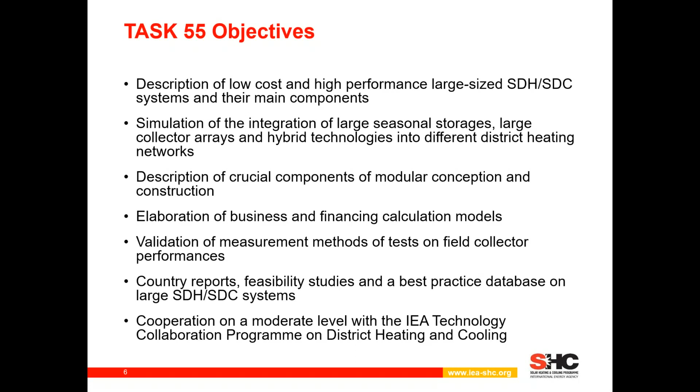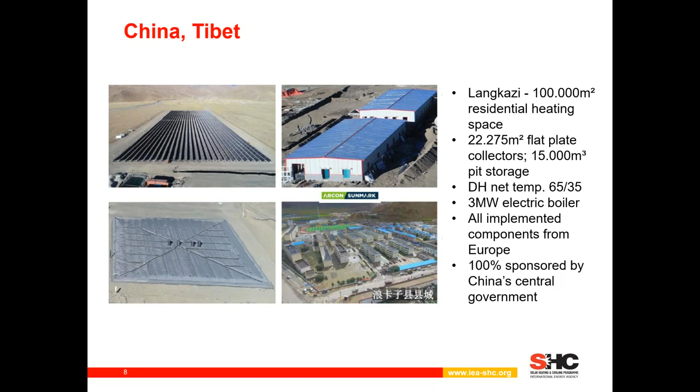And this is another installation, which is pretty new. It's been operating since November 2018, in Tibet, about 22,000 square meters of collectors, also with seasonal storage. They have a low temperature district heating net, and what's very special is that all components of this installation are from Europe. Most special is that China's government is 100% sponsoring this project. So China shows us how it can work.

These are the trends of solar district heating. Denmark infects several countries around the world with their large installations and long-term experience. A further trend is to maximize the solar thermal share, to eliminate barriers, and to find opportunities for solar thermal, and then further development of seasonal storage concepts.

Then we need to define model-based control strategies for the whole system, not only for the solar thermal part but for the whole system, including the district heating net. And then it's needed to design a solar thermal system including hybrid technology. By hybrid technology we mean seasonal storages, biomass, or waste heat, or interactions with CHPs.

So I'm at the end of my presentation. I will tell you where our next meetings will take place. In 2 weeks we will have our 6th meeting in Spain, in Almeria, from the 8th to 10th of April, and we will have an interesting technology tour to the solar platform of Almeria. It's a very big testing platform for solar collectors.

The 7th meeting will be in Sweden, in Härnösand, not at the end of September as planned. It's pretty new - since yesterday we know it will be in the first week of October. We will send out the date soon. So if you want to participate in one of these meetings, just please contact me.

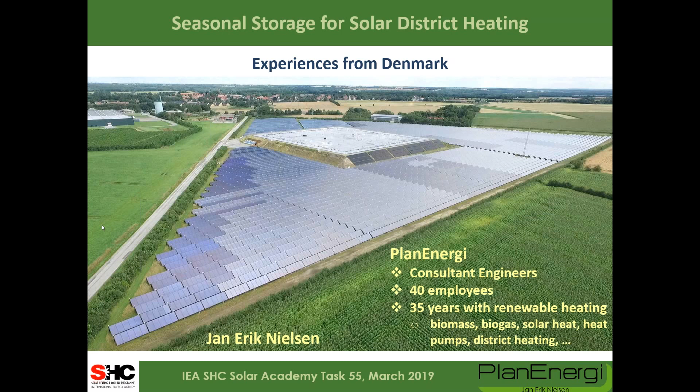Please. Thank you very much, Bärbel, for the nice introduction. And hello everybody. I would like to share some experiences from Denmark on large seasonal storages. I'm working with the company PlanEnergi, a small consulting company based in Denmark. We are 40 people, but we have long-term experience with renewable heating, especially district heating.

Coming to the storage, we see these large heat storages as a very important component in future energy systems, because having these storages, you have the possibility to couple the electricity sector with the heat sector. There can be interaction via heat pumps and combined heat and power plants. So these heat storages can then help levelize the dynamic electricity production from wind turbines and PV fields.

But today I will not go into all this system, but I will focus on the interaction between, or the connection between, the solar thermal collector fields and the large seasonal storage.

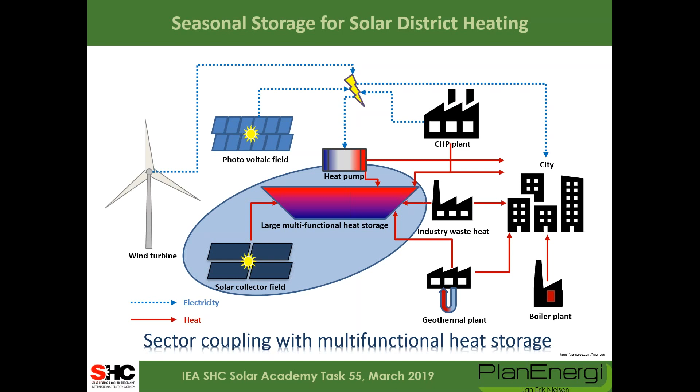So why do we do this in Denmark? Yeah, because we want to couple the electricity sector with the heat sector. We have a lot of wind turbines in Denmark - more than 40% of our electricity production is from wind. So we have the need for this, and we have been working on this for some years.

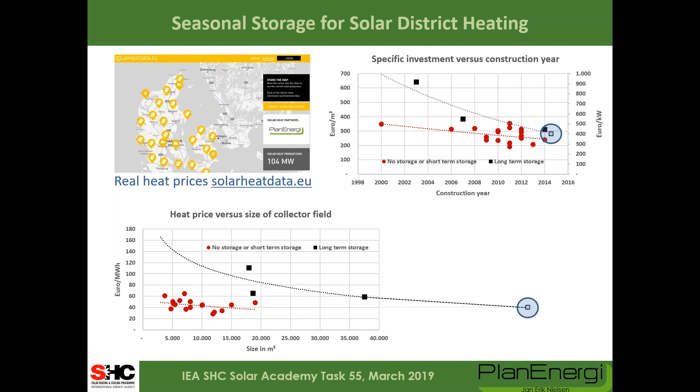The next figure here is the heat price, in euro per megawatt hours, and you see here, of course, the same tendency. The x-axis is here the size of the system. So we have very large systems now.

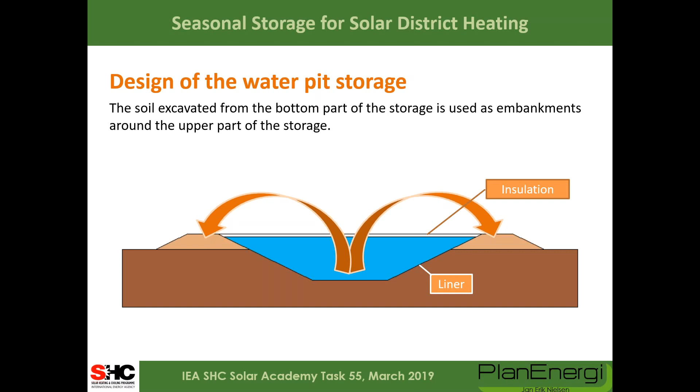We have most experience in so-called water pit storage, which is a simple storage where you just dig a hole in the ground and you put the soil from the hole to the sides. You put a foil inside this hole and you fill it with water, and then on top you put an insulated lid.

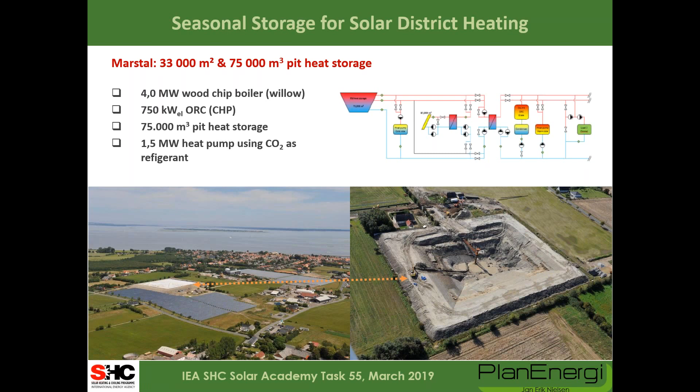An example of that you see here in Marstal. This is a 75,000 cubic meter storage. To the right we have a picture during the excavation. You see these large machines seem small in connection with the storage size, and this is then to the left we have the final storage covered with the lid. This storage serves in total 33,000 square meters of collectors.

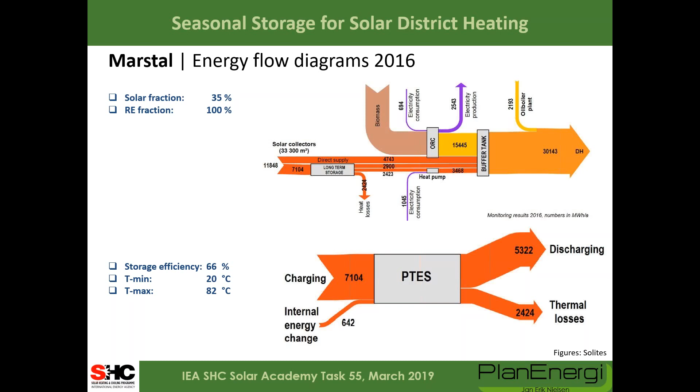We have done some measurements. So on this system we have a solar fraction of 35%, and they claim to have a renewable energy fraction of 100% because they fire with biomass. If we look then on the energy balance on the store, we see here a storage efficiency of 66%. So this means that 34% is lost. We have the temperatures between 20 and 82 degrees.

Another example is in Dronninglund. Here we have 60,000 cubic meter pit heat storage, serving 38,000 square meters. You see the collector field to the left here, and the storage is actually integrated in an old gravel pit. And to the right you see the whole system.

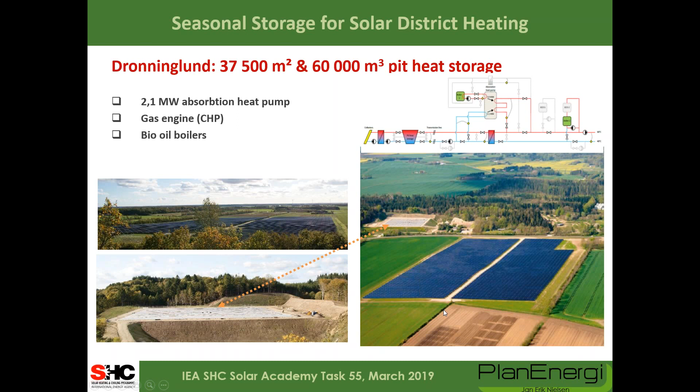Here we have a solar fraction of 40%. And what is very interesting in this case, when you look at the heat balance for the storage, we have actually a storage efficiency of more than 90%, so the heat loss is less than 10%. So this is very encouraging, actually - the annual heat loss is only 10% of the energy output.

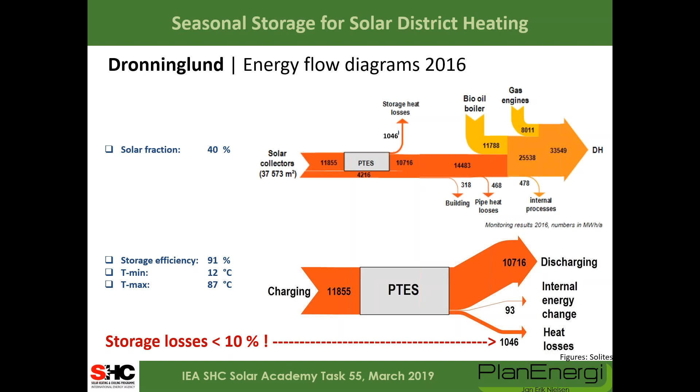You see here a low minimum temperature, so there's a heat pump which is lowering the temperature in the storage in the winter and in the springtime, and this is of course part of the explanation of the low storage heat loss.

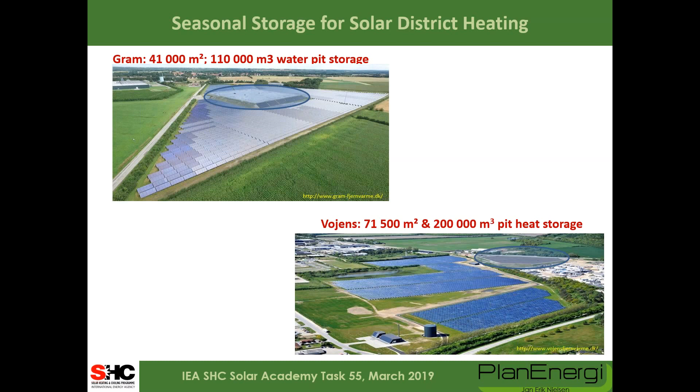We have more pit storages, but we have not in PlanEnergi been involved in these systems, but they have very large storages between 100 and 200,000 cubic meters.

Looking at the prices, if you make them big enough, you have a cubic meter price of around 30 euro. So this is not very expensive actually for energy storages. This is a very cheap price.

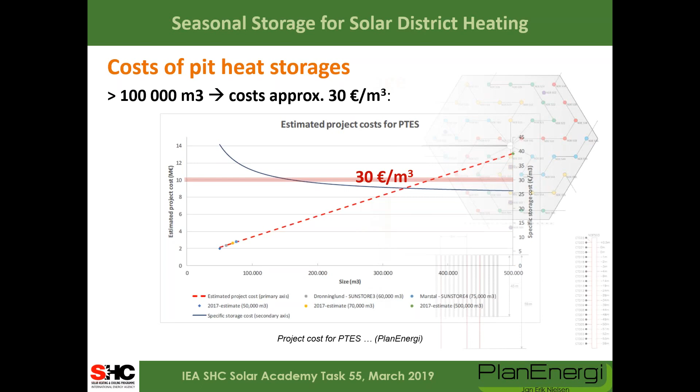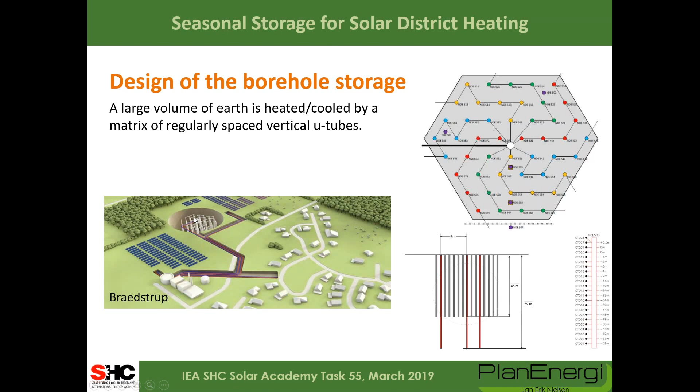We have one demonstration project of borehole storage for solar energy. This is demonstration size only. But you see here the model of it. So we have pipes in the earth, and you see on the next picture here that we put the heat down in the earth in the summer, and then we can extract it in the winter. Also here we have a heat pump.

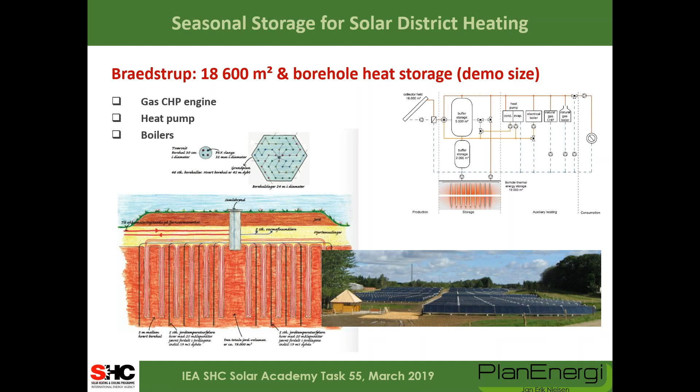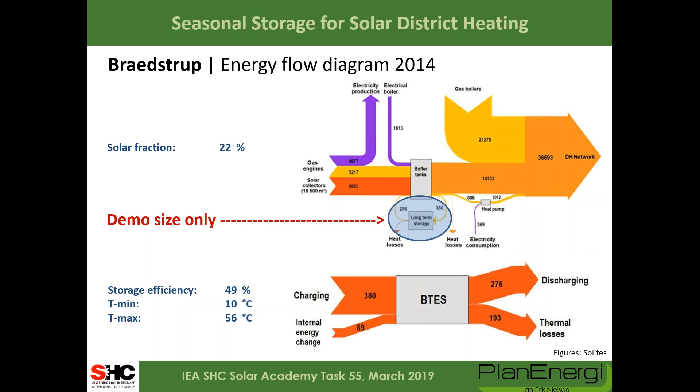If we look at the heat balances here, we have a solar fraction of 22%, and you see in the circle around the storage, as it's only a small size storage, it's only a small part of the energy going to this storage. And this is also seen in the storage efficiency, because the bigger the storage is, the bigger the storage efficiency can be. So here we have only a storage efficiency of 50%, but compared to the size of the storage, it's actually quite good.

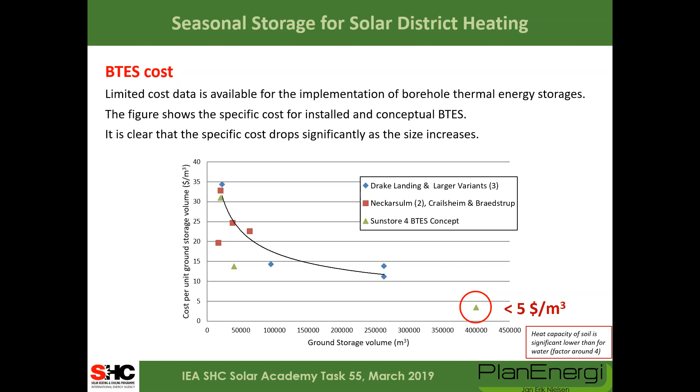Looking at the prices here, we have maybe not so much experience, but we think in the future, if you make it big enough, we can go down to $5 per cubic meter, and this is also a good low price. You should consider here that this is per cubic meter earth, and earth does not have the same heat capacity as water.

These were my words. You can see more information on the Task 45 website, the fact sheets we made in this task, and we are now updating these fact sheets, and you'll soon see updated fact sheets on the Task 55 website. Thank you very much for your attention.

Thank you, Jan Erik. I think this was a very good overview and very impressive, especially where costs are concerned. Very good for investors if cost curves are going down.

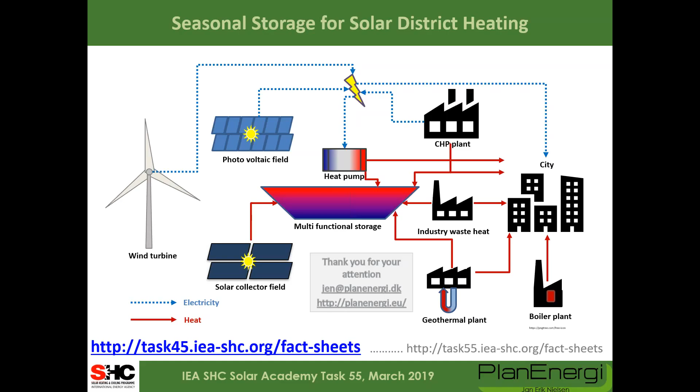Thank you very much. Our next speaker comes from Germany. It's Dr. Inge Karin Rühling. She looks back at more than 30 years of research in heat supply technologies. Currently, she is professor in the field of building energy systems and heat supply at the Technical University Dresden, and she is senior researcher at the Institute of Power Engineering. Her speech today is Decentralized Feed-in in Existing District Heating Networks, Comparison of Hydraulic Effects of Solar Thermal and CHP Integration. Her presentation is online. Karin, please, your presentation.

Thank you very much, Bärbel, from Dresden. Nice to meet all of you indirectly, in all parts of the world, 243 persons currently. My wonderful young colleagues, Ben and Christoph, assist me in this conference, and I hope you can understand us very well.

Let's start with the focus of the study and some general aspects concerning the tools and the methods. The main focus, as you can see, is existing district heating networks. We want to identify thermohydraulic impacts of more than one, that means up to 24, decentralized feed-in systems varying in size and position in a system. We compared not only solar thermal systems, but also the possibilities and limitations of decentralized combined heat and power units.

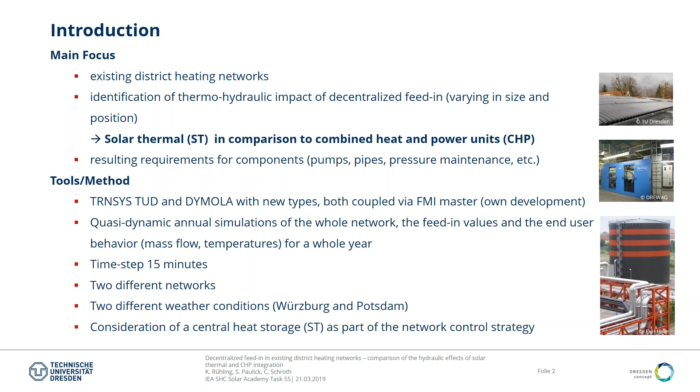The considered networks are two, network G and network B. Both are existing real systems in Germany. Network G is a third generation district heating network with supply line temperatures in winter up to 90 degrees centigrade and in summer up to 65 degrees centigrade. In most cases, we had to reach feed-in temperatures higher than 70-75 degrees centigrade. Network B is a bigger one, a second generation meshed district heating network, and the supply line temperatures are higher. That means we had to reach in feed-in situations for solar thermal purposes up to 110 degrees centigrade in spring and autumn.

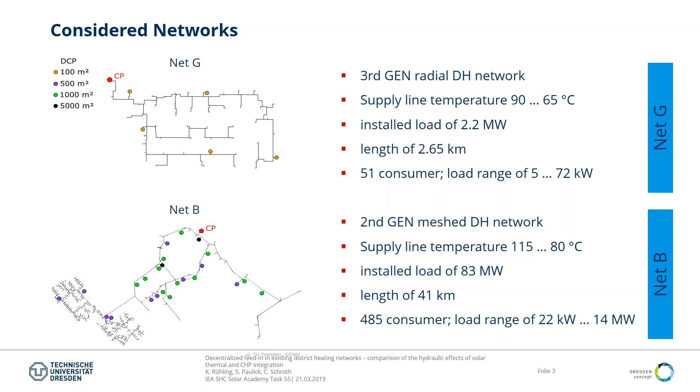What are our boundary conditions for the simulation? We investigate up to 5 solar thermal decentralized feed-in variants.

We start with a small size net with 5 times 100 square meters. That means around about 0.35 megawatt peak thermal. And in the net, we investigate a higher performance for the summary of the 4 versions of solar thermal decentralized feed-in, starting with 10 times 500 square meters up to 24 decentralized heat producers with, in summary, 27,000 square meters. That means up to around about 19 megawatt peak thermal.

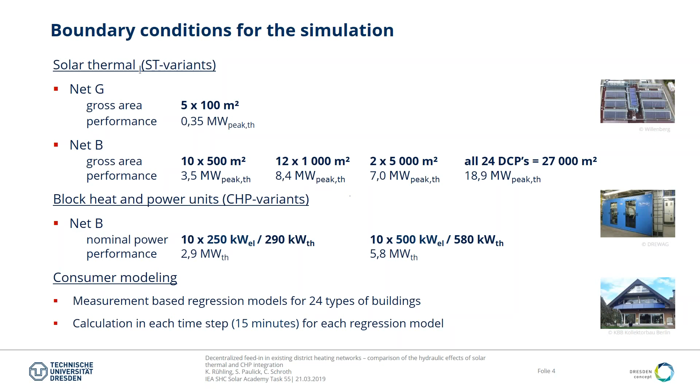Compared with a solution based on natural gas block heat and power units, that means we compared with up to 5.8 megawatt thermal input into the district heating network. Additionally, we had to make a good consumer modeling. These are models based on regression models for 24 types of buildings, and we calculate the reaction depending on the supply line temperature of the district heating network. We make results for the return line temperature of the customer and the 7 variations of the simulation study at the left-hand side.

So it looks like we lost the sound on Karin, but we might get it back in a second. So everybody, please hang in there.

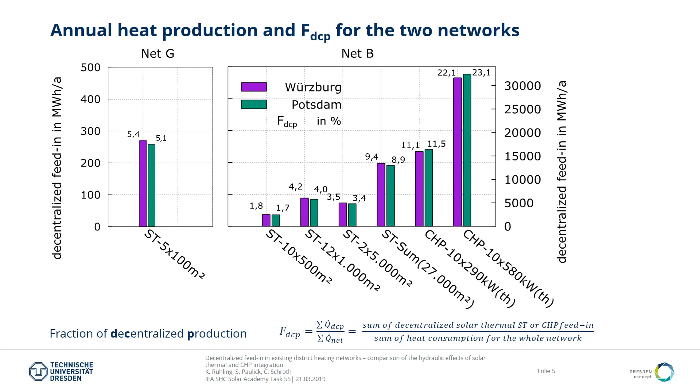For the solar thermal variants, we reach up to 9% fraction of decentralized production. Higher for our both CHP variants. That means we have in the summertime, the customer side of the CHP, the decentralized feed-in, use their produced heat, not in summertime by its own, but in wintertime. They use their produced heat primarily in their own building and so on.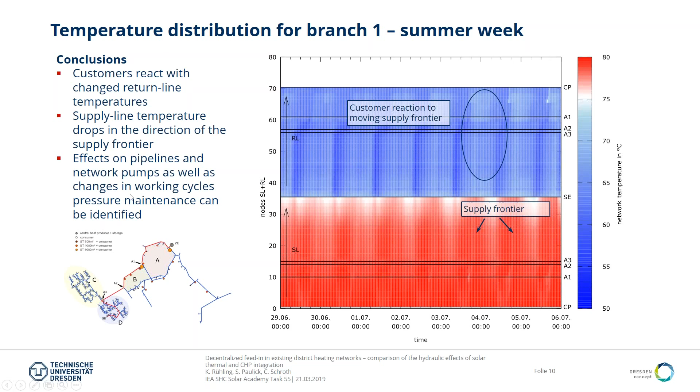That depends on the situation, because we feed in with a nominal supply line temperature from the central heat generator as an aim for our control of the decentralized feed-in. We see the effects on the pipelines and network pumps as well as changes in working cycles and pressure maintenance. All these we can identify.

Our short conclusions: we reach annual solar fractions up to 9.2% in network B with 27,000 square meters. The flow reversal and full supply by the decentralized feed-in of solar thermal plants we identified. We can make a pre-dimensioning for central storages. We also investigate the combination with combined heat and power production.

What's our outlook? We want to make more simulations with network B or with a standalone solar thermal plant in the range of 25,000 to 50,000 square meters. We want to make predictions of consequences for the central producers concerning the part load efficiency and the CO2 emissions. We want to identify the requirements for the pump and make investigations regarding the thermal stress and the lifetime of the district heating pipes.

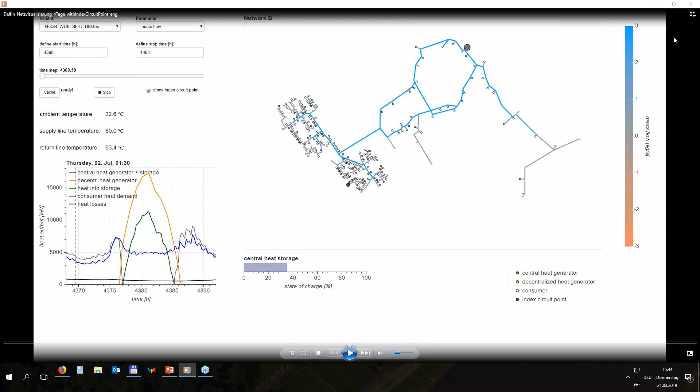At the end of our presentation, we hope we can show you a short video for the results of our simulation. This is a short overview over 4 days. We start at one day in July, the 2nd of July. The ambient temperature is around 23 degrees centigrade, the supply line temperature 80 degrees centigrade, and we have in Germany high return line temperatures in normal district heating systems, up to now 63 degrees centigrade.

What you can see in this left figure is our heat output: the central production in gray, in blue the sum of our decentralized customers, in green the heat into the storage, the stored energy, and also the heat generation of the decentralized solar thermal plant in yellow color. Additionally, you see the development of heat losses in the whole district heating network as a value.

Here in the middle of the video you see the changing of the heat storage situation in percentage of load, the state of charge, and the variation of the values for central energy and decentral energy itself. The decentralized heat generators are orange colored, and the index circuit point you see in this value. This is the longest way with the highest pressure differences in the network.

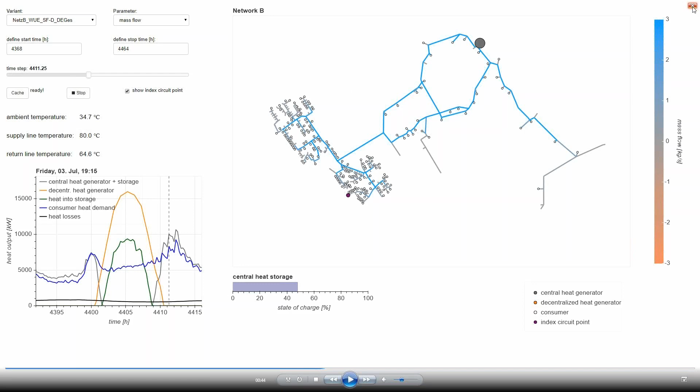Let us go forward, and again and again the same. On these kinds of days in July, we have a fixed index circuit point, but in other situations, for instance in spring and autumn, we see a change of this index circuit point. This is all what we can present to you today.

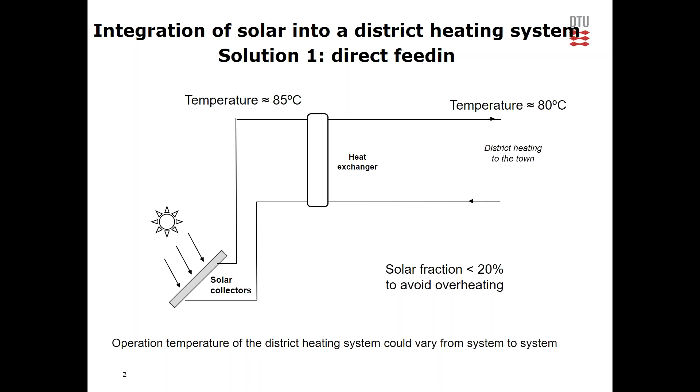The second type includes short-term heat storage. The typical volume for this short-term storage is lower than 7,000 cubic meters, and typically this gives energy storage for a couple of days up to 1 week. The auxiliary energy for this system typically will be, like in Denmark, a gas-fired combined heat and power generator, or a biomass boiler or other renewable technologies.

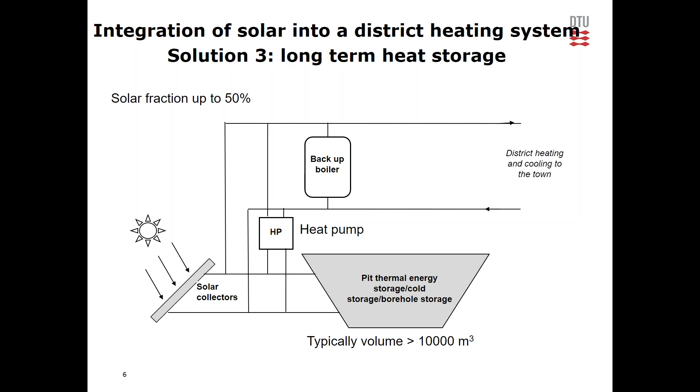And this is one example, as mentioned by Sabina in the Task 55 project. And this is a project in China, which is realized by Arcon-Sunmark and Sunrise. And this is a very typical system in China because this district heating system does not produce electricity. So only heat is produced.

And we can see that the system has more than 20,000 square meters of solar collectors, and the storage is about 15,000 cubic meters. And the system provides heat for a town with a floor area of about 80,000 square meters.

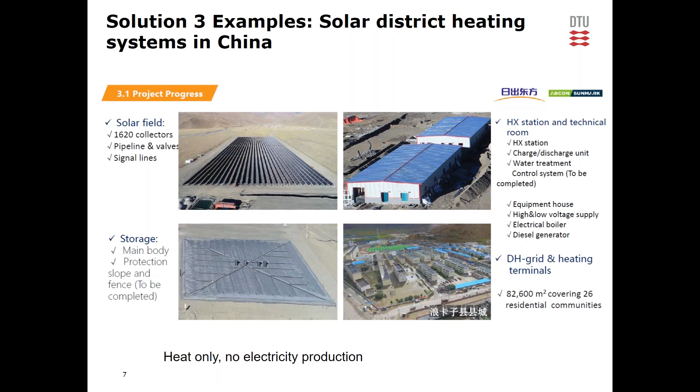And then the integration of solar into a district heating system, type number 4, that is the combination of solar and combined heat and power generation. This system could also include a long-term heat storage. And the fuel used for this CHP generator could be gas, diesel, or also wood chips or other biomass. I will give one example of this type of system.

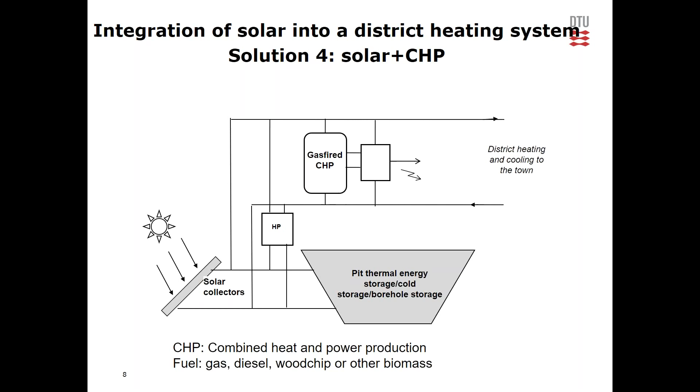And first, this slide shows you the benefit of a smart heat storage. Just as Jan-Erik has mentioned, a smart heat storage is very important for such a system because of the long-term storage. Because of the large volume, a large amount of heat produced by the solar collectors in summer, when there's limited heat consumption, will be stored in the storage, and this heat can be kept long and utilized later over the seasons in autumn and in winter for heating the network.

And also because of the large volume, the waste heat from the CHP generator, the gas motor, could also be stored in the storage. Therefore, electricity production and heat production can be decoupled. So that means when there's a very low electricity price, it is not economical for the plant to produce electricity. Then the generator could be shut down, but the heat can be taken from the heat storage and used to supply heat to the consumers.

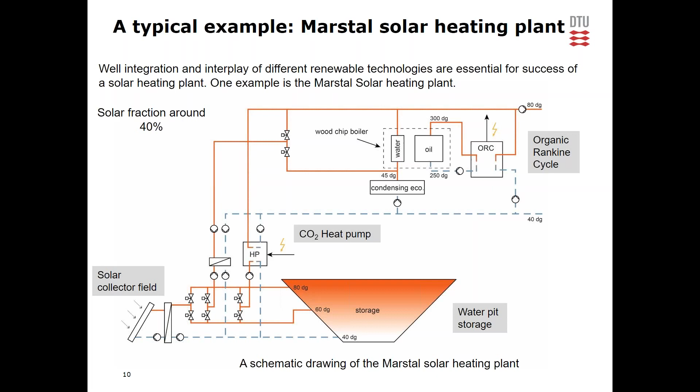And this is one example, the Marstal solar heating plant Jan-Erik has already mentioned, but I will focus on the system point of view. We can see that for this system, there's a pit storage and a solar collector field, and the system uses a wood chip boiler combined with ORC, which can generate electricity. This system also uses a CO2 heat pump. The solar fraction for the system is around 40%, or even up to 50%, depending on the year. It is because of the heat storage that the good integration and interplay of different renewable sources could be realized. I will spend some slides on details of this system.

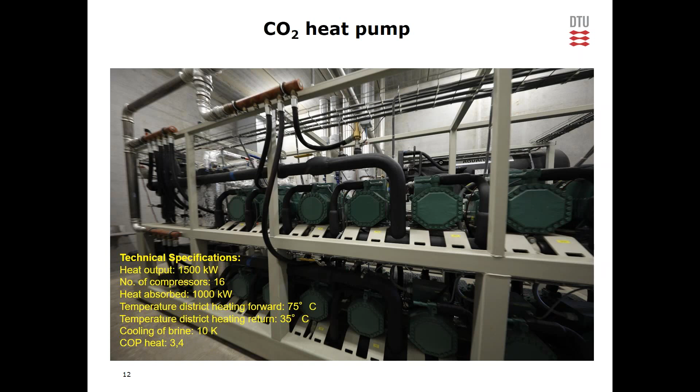So I will share with you some of the monitored data of the system. And first, I want to show you the picture of the heat pump. It is a CO2 heat pump with a heat output of 1.5 megawatts, and there are altogether 16 compressors. The district heating forward temperature is 75, and the return temperature 35 degrees Celsius. The average COP for this heat pump is around 3.4 or 3.5.

This is the monthly heat balance in the Marstal Solar district heating plant in 2015. This is a result of an EUDP project here in Denmark, carried out together with PlanEnergi and Solites. From this, we can see the heat balance for each month of the year 2015.

The bars in yellow show production from solar collectors, with most production in summer and maybe also late spring. The production from the biomass boiler is mostly in winter and autumn. We can also see the contribution from the pit storage, shown in pink, mainly in autumn and also in early spring and winter.

We can also see the electricity consumption of the heat pump, shown in red. This is in winter, when the temperature of the pit storage is too low to be supplied directly to the district heating network, so the heat pump is necessary to boost up the temperature. From this, we can see that by combining different renewables, it's possible to cover the demand for the whole city.

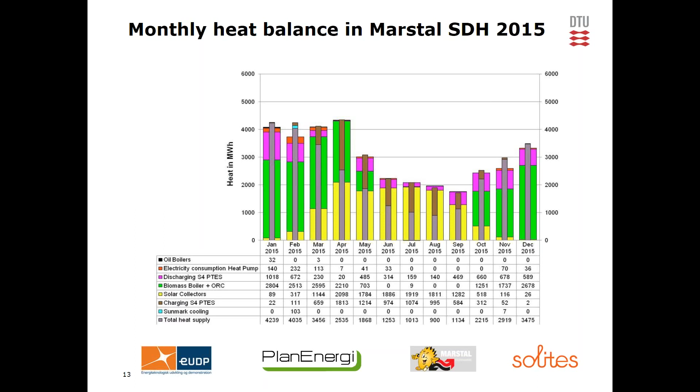This is the monthly solar heat production, and we can see that in summer there's a lot of sunshine, so solar production is quite high compared to the rest of the year. But what is interesting is for April, we can see that this year in April we have the largest monthly solar heat production. The reason for this high solar production is, of course, that the solar radiation is quite strong that year.

But another important reason is that because of the use of the heat pump, the temperature in the pit storage is decreased to quite a low level, like 10, 15, or 20 degrees. Because of this low temperature level, the efficiency of the solar collector could be increased, resulting in higher solar production in April.

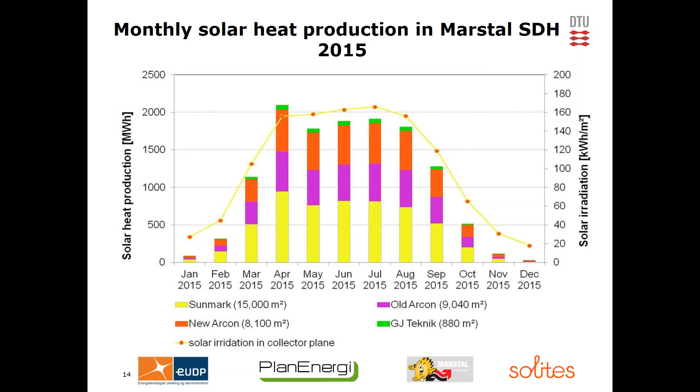This shows the operation conditions of the heat pump for the year. We can see that the heat pump outlet temperature is quite stable, like 75 degrees, and the condenser's inlet temperature is somewhere between 35 to 40 degrees. That is the return temperature from the district heating network.

For the evaporator side, that is also from the heat storage side, the inlet temperature is sometimes 50, or even up to 60 degrees Celsius, while the temperature back to the pit storage is around 20 to 30 degrees. The annual COP is around 3.0 to 3.5 on average.

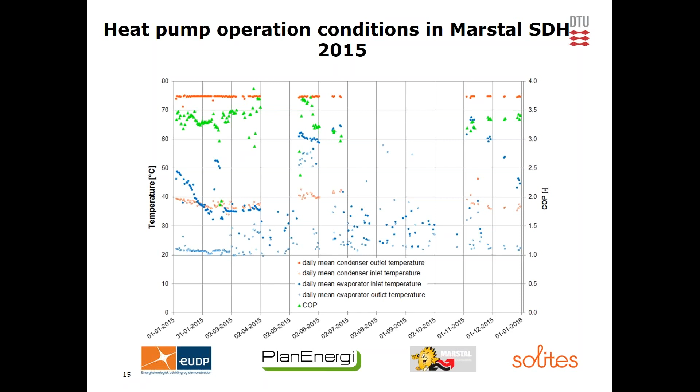This slide shows you the energy flow diagrams in 2015. We can see that for this year, the solar fraction is around 40%.

Among this contribution from solar, some part goes directly from the solar collector to the buffer tank and to the network to be utilized. Some of it will be stored further in the long-term storage, the pit storage, and used later. And some part first has its temperature boosted by the heat pump before being used. Of course, there's some part that will be lost to the ambient.

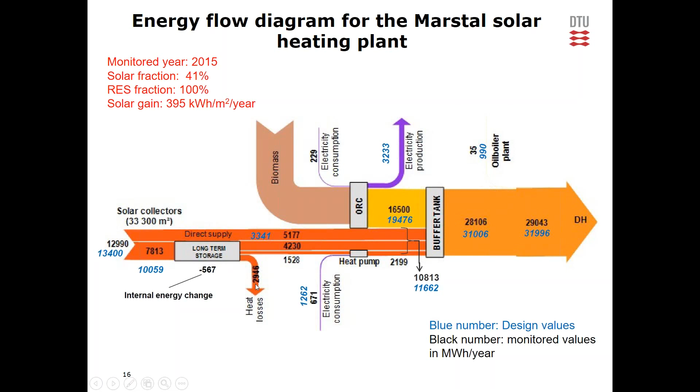Here at DTU, we have developed models for such a system, which can enable optimization of a solar heating system. In this system, you can see that we have the solar collector fields, and we have the pit storage, including both short-term and long-term storage. We also have different heat pumps and also the ORC unit included.

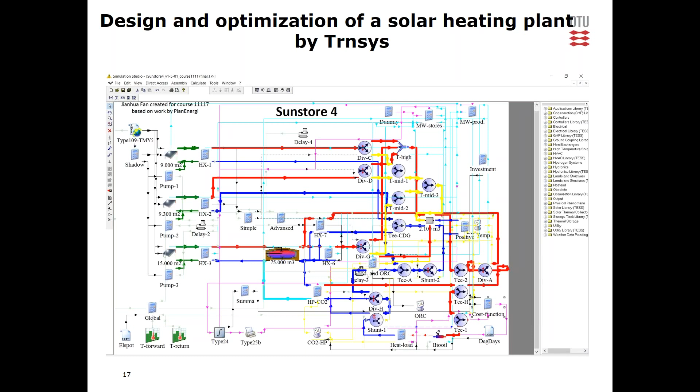For this system, we have the major components of the solar heating system included, so we can calculate the yearly thermal performance of the system with different parameters. Therefore, we can use it to design and optimize such a combination of different renewables.

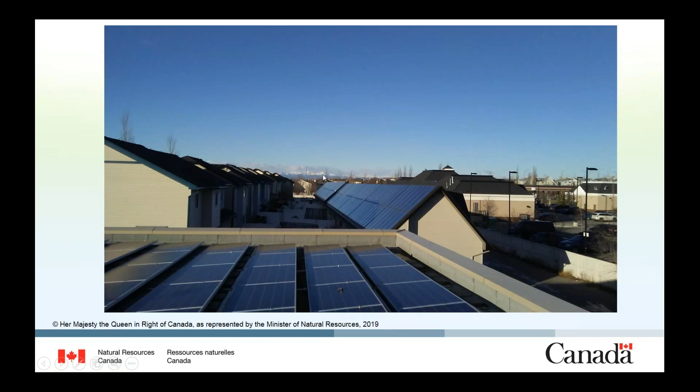Separately, we have solar water heaters for the house. The central system for Drake Landing does not supply domestic hot water. Domestic hot water is separate and individual for each house, where we have a 2-collector system preheating the hot water for a gas water heater. So we don't have heat pumps.

This system was designed as an ultra low temperature district heating system. Most of the time it supplies heat to the house at 37 degrees and returns at about 28. So that's quite different from most of what we have seen today.

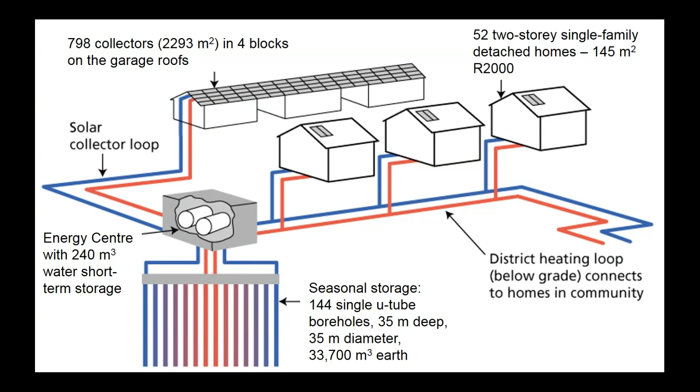But there we can see the heat flow goes from the center to the outskirts of the borehole field. That way the center is always hotter than the outskirts of the borehole field.

Most of the houses in North America use air in terms of heating and cooling. And in the case of Drake Landing, it was necessary to design a specific system for that project that could supply heat even at lower temperatures.

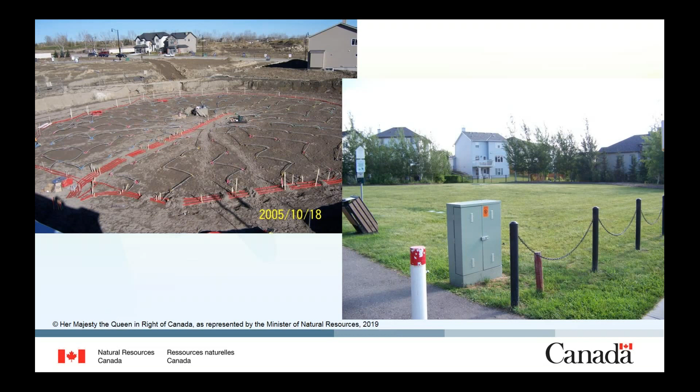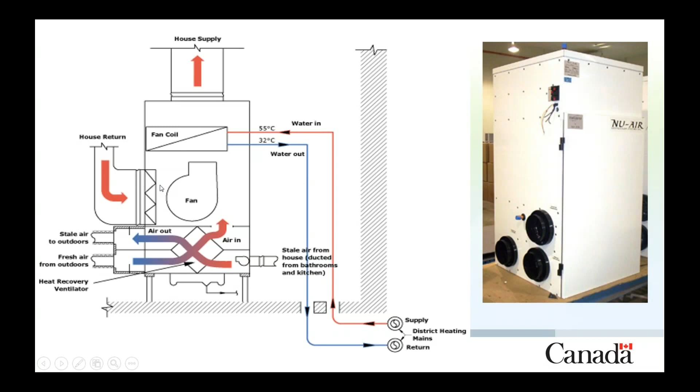The system was designed based on building simulations, and we had help from our buildings colleagues to design and evaluate the heat load for those houses. The houses had a higher level of efficiency than the houses typically built in that area at that time. The system was then simulated in TRNSYS to optimize the design and evaluate the parameters of design and operation, and since the beginning, it has been monitored.

So Drake Landing has been operational now for 12 years, so we have 12 years of fairly extensive data on its operation.

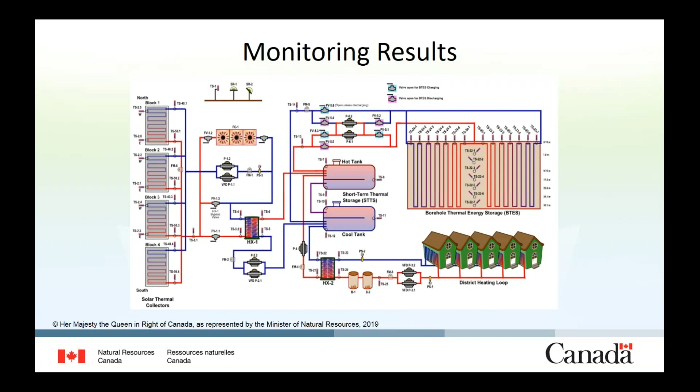But the individual metered heat usage is quite different. If those systems were individual, we would have a big problem, but we don't, because we are working on a community scale, and that's the beauty of community systems. That's an interesting point to remember.

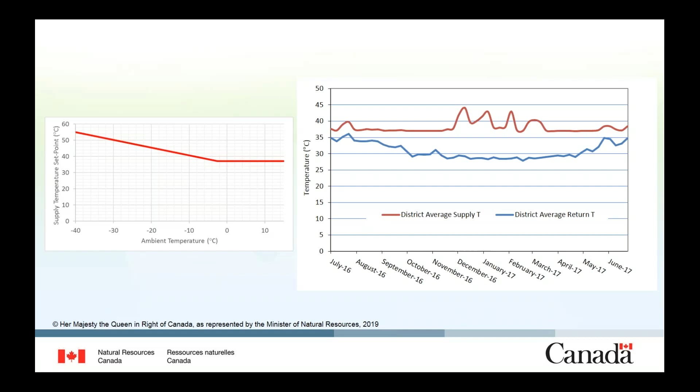It wasn't part of the original design, so if we were using a heat pump, that temperature would come down even lower, but that was not the case in terms of the design. We have about 30 degrees delta T in terms of effective storage.

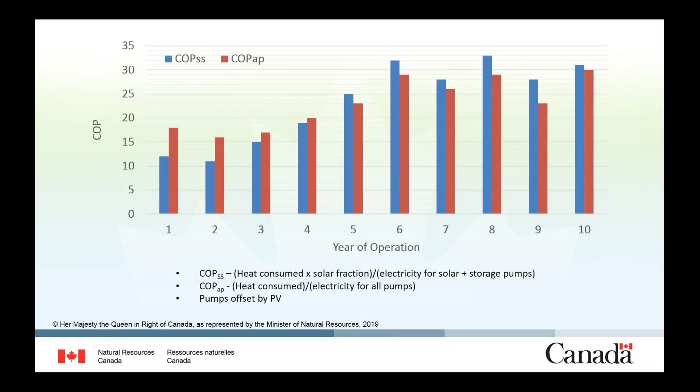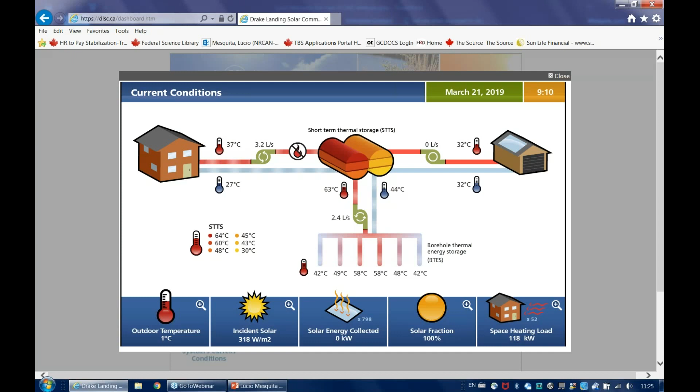Maybe directly a question to you, because it just was raised. How do you heat houses with these low district heating temperatures? It's all on the design, right? The houses have set points of 21, 22 degrees. So if you design the fan coil appropriately, you can do the work with only 37 degrees water. So because it's new build. Okay. Yes, we wouldn't be able to do that if we had an old design with radiators. Right? That wouldn't be possible.